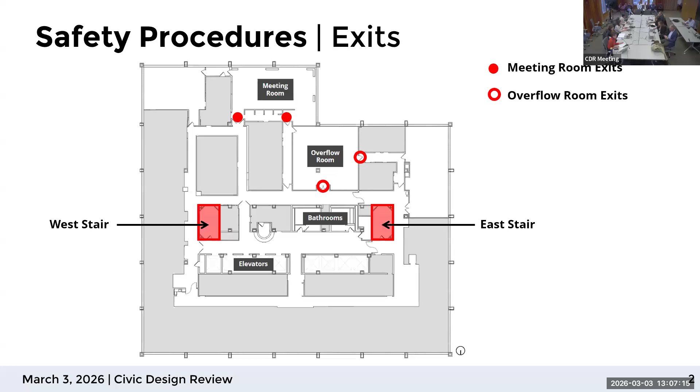The Civic Design Review Committee is a subcommittee of the Philadelphia City Planning Commission and is charged with assessing the design of the public realm of proposed building projects in Philadelphia and how they impact their neighborhoods. CDR is an advisory process. However, applicants are encouraged to accept the results of the review and incorporate the committee's findings into their design.

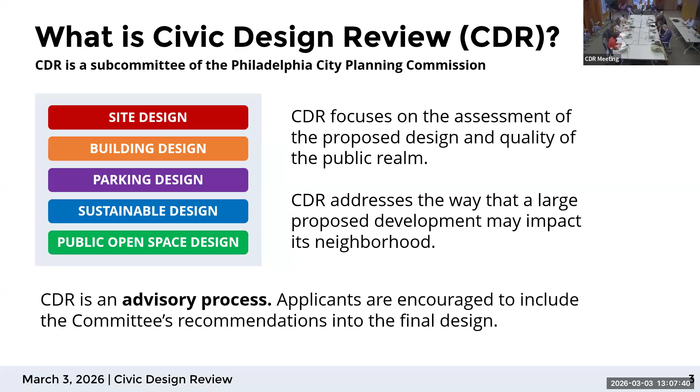The Civic Design Review Committee encourages and values participation during its meetings. Members of the public will have the opportunity to comment on agenda items during the public comment period. Questions and comments will be heard during this period, which will be open and closed by the CDR committee chairperson. Public comments should focus on the design-related issues only. When addressing the committee, please speak clearly and identify yourself by name and, if applicable, affiliation. A 2-minute time limit for public comments will be enforced by the committee chair and the meeting host.

If virtual, please use the raise hand function in the Zoom application and wait to be unmuted by the meeting host. If joining by Zoom phone, you may use the raise hand feature by dialing star-9 during the virtual public comment period; staff will unmute phone users. Please note that Q&A is only for procedural questions. We ask that you avoid writing your questions and comments about the project using this function. Planning Commission staff can also receive comments by email. If you would like to submit an email, please send to cdr@phila.gov.

First reviews will start with an applicant's design professional presentation, limited to 10 minutes, followed by PCPC staff summary. Second reviews will start with PCPC staff analysis before the applicant's design professional presentation, limited to 5 minutes. Staff analysis will be based on the requirements of the zoning code and Planning Commission regulations, which will focus on site design, building design, parking design, sustainable design, and if applicable, public open space design.

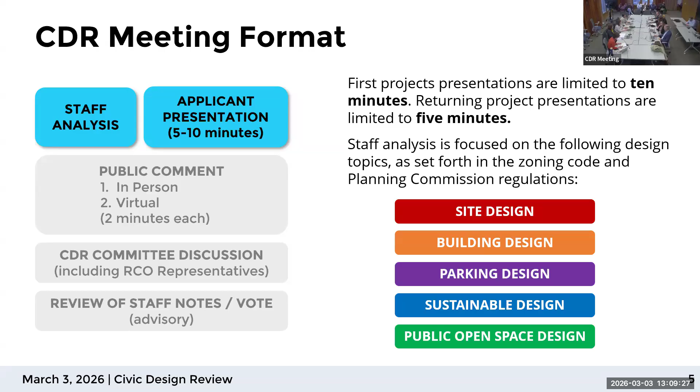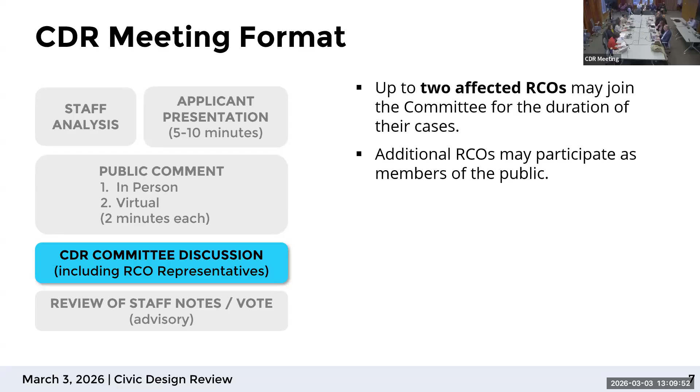Public comment will follow. Please do not restate the comments of your neighbors. Comments submitted in advance via email have been given to the committee and do not need to be read aloud. CDR committee discussion will follow the public comment period. Up to two affected RCOs may join the committee for the duration of their cases. Additional RCOs may participate as members of the public.

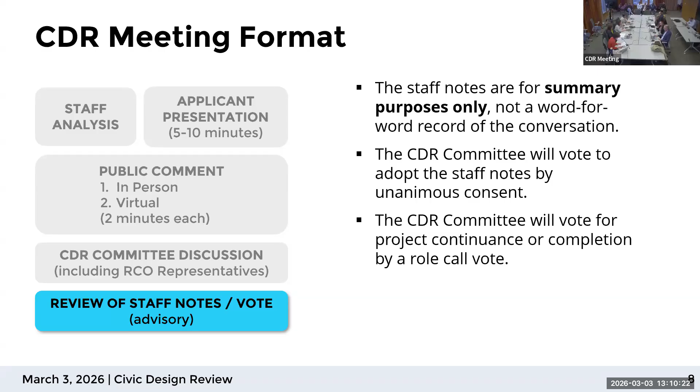After the discussion, staff will present notes taken during the meeting. The staff notes are for summary purposes only and not a word-for-word record of the conversation. The CDR committee will vote to adopt the staff notes by unanimous consent and will be voting by roll call on whether or not a project needs to return. For roll call vote, I will ask commissioners for their votes individually at the end of each agenda item. The chair will now call the meeting to order and announce the quorum.

Do you want to try? Try that. Thank you, Mina. Thank you very much. Good afternoon, everybody.

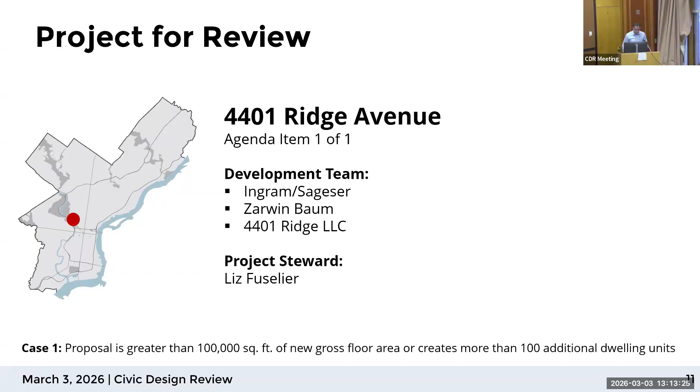All right, good afternoon everybody. Thank you very much for taking the time to meet with us. So I'll be presenting for 4401 Ridge Avenue. I'll give a quick background and briefing on it, and then I'll let Lance from Stokes Architecture, the design architect, explain a lot of the features and looks and feels of it.

This is a project that is getting a second life, so to speak. It was previously presented at a prior CDR and it didn't come to fruition. We've now stepped into this project. It's a different design than was there previously, but we did take into account a lot of features and aspects of the previous design that we thought we could improve on and make work better with the community.

We've worked closely with the East Falls Civic Group, we've met with the zoning committee, and we had our public meeting on February 18th, I believe. Then we had a smaller meeting with the neighboring senior housing facility, which is immediately adjacent to it. It's difficult for some people to really do the Zoom versus really bring it in person and show everybody. So we showed them the CDR design just to get some feedback from them and inform them about it, along with the numerous meetings we had with the zoning committee.

I think it's been a very fruitful and positive process in that they gave us a lot of feedback, which we've incorporated. If you look at the original zoning plans versus what you're seeing here, it's almost a completely different project. We had these arches that really kind of took over a lot of the look, and that was completely removed. As I go through the project, I'll be able to show that.

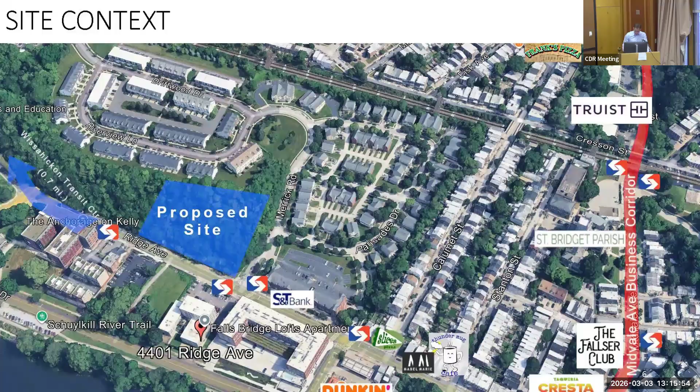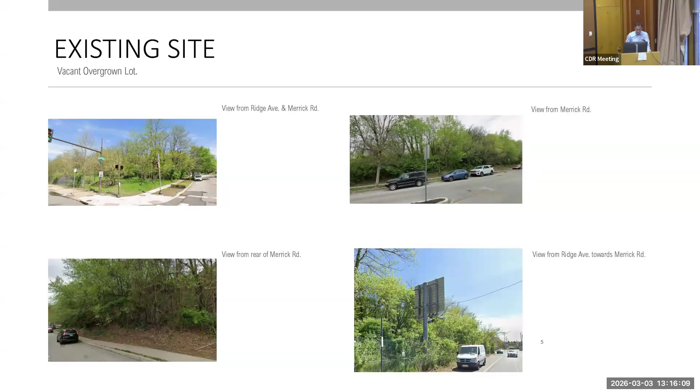So what we did was, I want to show it. It kind of shows it here. You see how this all kind of rises up. There are actually houses that sit behind there. And the prior project was going to build right up onto its property line.

There's actually an existing retaining wall that was there that they would remove. And there's a lot of trees that are all in the back over there, which you can kind of see along in this view. So instead of us doing what they did, which was build right up onto the property line, or remove that retaining wall, disturb even more of the steep slopes, and then get rid of all those trees, we actually set the building back 20 to 30 feet along that side.

We preserve the existing retaining wall. We preserve all the existing trees that are in that location. And the height of the building is actually 20 feet shorter. So we went shorter in height at the rear, and we pulled the building back further away from it.

We added, and I think that's like a major component, a major issue that was from the prior project. And then, of course, we tried to soften up and do a lot of articulation and whatnot in the facade.

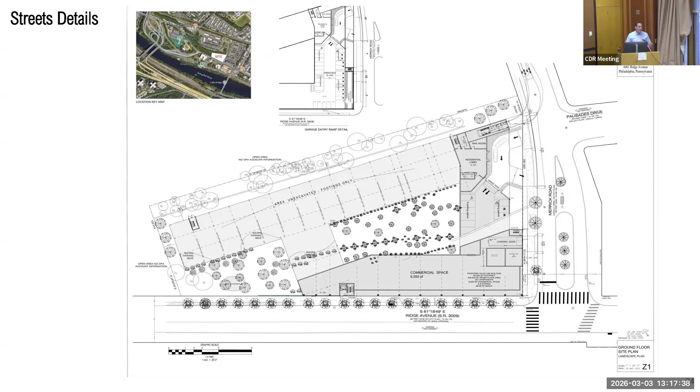I think a big thing for us in talking with the Civic group was really making it a walkable and approachable retail space. I know there's some difficulties with retail in that location. And I think by creating that 8-foot setback along the sidewalk area, you can put outdoor seating for a restaurant or anything. It just makes it walkable, more of a promenade, really enhances the features of that area.

Because that's really the end - so when you go to East Falls after that, you're heading over to 76. So let me go. I want to talk about any of the major features.

Yeah, so this is the proposed site of the location. This is its proximity that, based on feedback that we received from our pre-CDR meeting, shows its connectivity to SEPTA and local transit, shows its access to the Schuylkill River Trail. Obviously, you're right there by Kelly Drive. There's a lot of runners, a lot of bikers, so we want to show that we're really in the proximity.

And then really as far as context for this site, this is a CMX3 zone property, right? So this is meant for very high density. Obviously this building could be a lot bigger. And the only thing that really triggered it, going back to what Rich was saying...

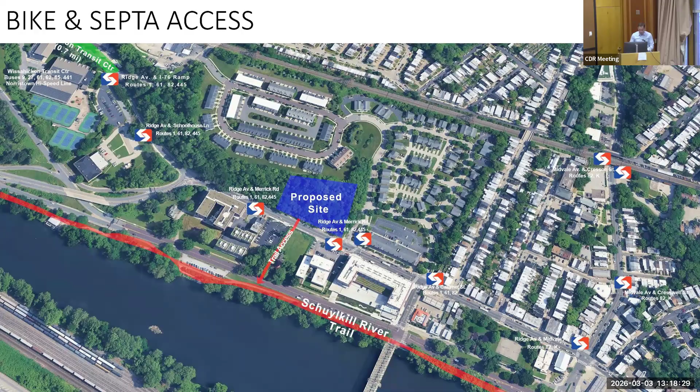If you look along here, right along here, this is where all the steep slopes were located. We originally proposed a curb cut on Ridge Avenue, which wouldn't disturb any steep slopes. And the streets department wasn't too happy about it. We had a scoping meeting with them involving PennDOT as well, and they said, really, we'd prefer you to have it up here.

That's actually what the prior developer had put together. Obviously, they had the same conversation. We didn't know about their conversations, but they said, do it up there. And it just made sense because really you were only going to be able to make a right turn coming out onto Ridge Avenue, and that really takes you to no man's land. If you're really trying to go left and go south, it's a very circuitous route. So Merrick Road has its own traffic light that is located over there, which helps control the traffic.

We pushed the driveway up. And what we did, a major component to this, is there are 2 loading docks that are here. The intention here, you see there's this circulation that kind of takes place.

What we want to do is limit as much traffic that's coming in onto the street. We don't want people double parking, so we have a pickup, drop-off. The width of this area is enough for 2 cars, so one person can pull up to the site and drop somebody off or drop off packages, and somebody else can take an Uber, drop off, and then circulate out as well.

And then of course it can continue into the building, with loading zones for people moving in, commercial deliveries, and trash pickup. The idea is one loading dock is the upper one, closer to our commercial trash, and the other one is for deliveries coming in, like UPS and FedEx. The point is we understand and appreciate that it's a larger project.

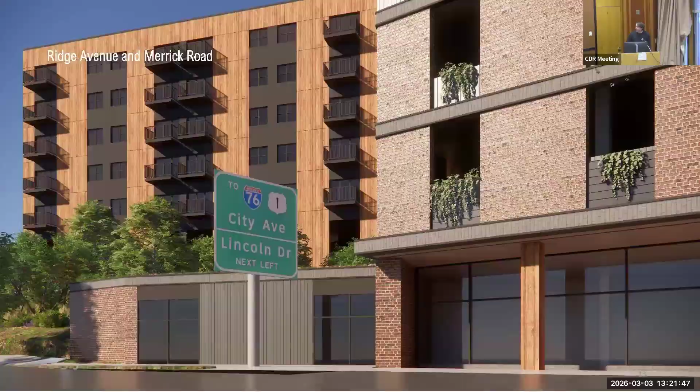No problem, I'll run through it real quick. Eric covered a lot of what we're going to be talking about, but I wanted to point out a big part of what we're trying to do is reduce the perceived massing of the building. We've got this donut-shaped building, and a lot of what we were trying to do was make it feel like two buildings, break it up a little bit, and cut the massing down, especially on Ridge Avenue.

The previous design that Eric mentioned had these large arches and was very inhospitable from the pedestrian point of view. So what we wanted to do, as Eric mentioned, is set back the commercial on the ground floor to create a more generous pedestrian walkway. As we know, Ridge Avenue is trafficked and people go fast on it, so having people set back from the street a little bit is very helpful.

Secondly, we also set back the top floor, reducing some of the unit count as well, to create a bit more relief of the building from the Ridge Avenue side of things.

And lastly, I'll mention a big part of what we wanted to do was material selection. On the back side, the hilltop side, we went with a wood look cladding, which feels a bit more natural and blends into the rest of the environment and landscaping around it. On the Ridge Avenue side, giving a nod to the context of surrounding buildings, we went with that Kelly brick on the ground floor plane, creating an implied structural grid over the entire facade that we break up with different colors, digitizing the facade a little to break up the perceived massing from Ridge Avenue.

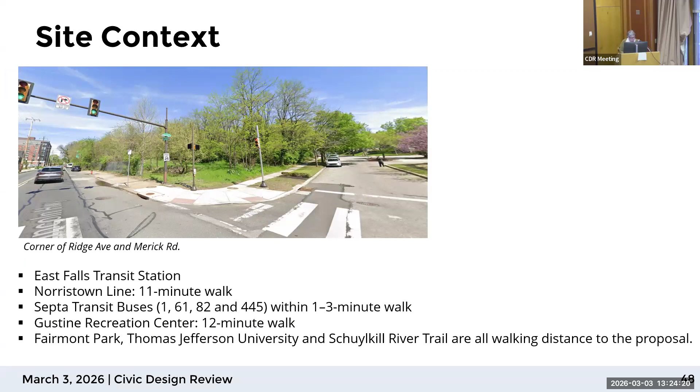This proposal is in a transit-rich area with numerous bus, train, bike, and pedestrian options available in the community. The street trees fronting the proposed building on Ridge Avenue are appreciated by staff. Due to the adjacent parks and trail networks, please consider adding bike racks along Ridge Avenue and Merrick Road.

Staff encourages the commercial use proposed at the prominent corner of Merrick and Ridge. Daylighting the ground floor windows will add to the strong street presence. The blank brick wall along Merrick could benefit from additional visual interest. Consider a mural to activate that pedestrian-friendly section.

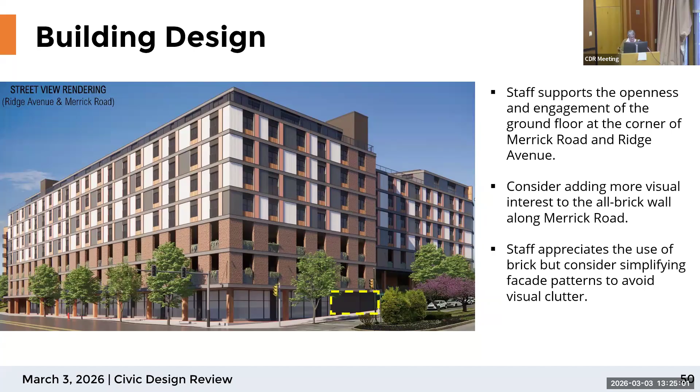The expansive green roof and rooftop amenity are greatly appreciated. Consider adding landscaping along the roof line to soften the safety railings. Please consider adding a mural or some kind of decorative color or brick to the entrance wall along Merrick Road.

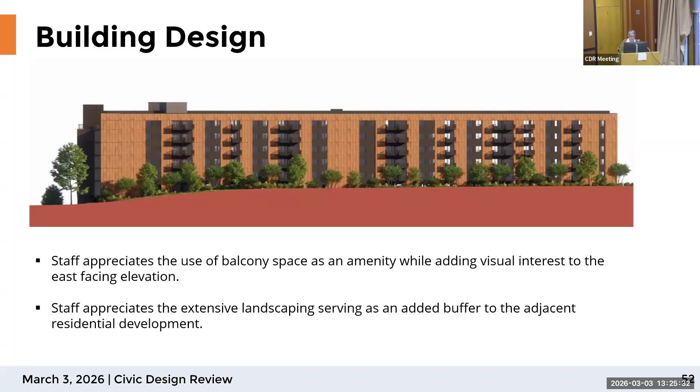Staff appreciates the use of balcony space as an amenity while adding visual interest to the east-facing elevation. We also appreciate the extensive landscaping serving as an added buffer to the adjacent development. The deck parking is appreciated, but staff asks for a greater number of EV designated spaces be added to the existing proposal. And for ease, the bike room may be better situated closer to the main entrance.

The proposal meets 8 of 12 applicable metrics. Consider adding solar panels to offset energy costs for residents and the overall building. Thank you.

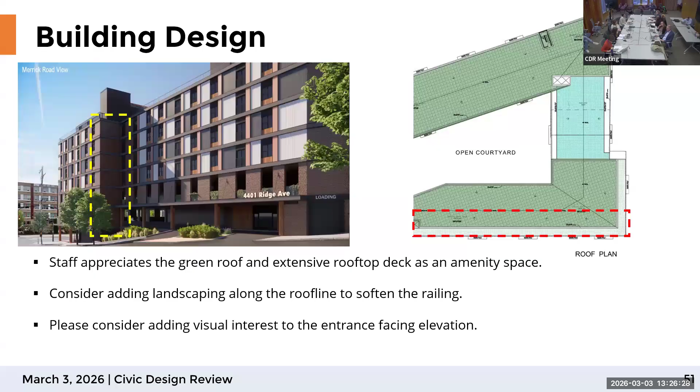This is a very important site for us in East Falls. It's the last remaining CMX3 site. We feel that if it's a good design, a good building, then it can really help us revitalize what has been a fairly unsuccessful...

Okay, sorry. Thank you. Shall I repeat that? Yes, please. Okay. Thank you.

So this is the last CMX3 site in East Falls available for redevelopment. It's critical that this is a well-designed building so it can contribute to the revitalization of our commercial strip. Everything after this building will just be CMX 2.5 small-scale redevelopments within the commercial district. The adjacency to the river is important - this building acknowledges its site next to the river. It's not landlocked. It looks at trees across the valley, trees in the back, and there's a river half a block beyond. So this has a chance to really make a difference for East Falls.

Briefly, in our neighborhood meetings, the feedback to date has been about traffic and congestion. They're worried that folks are going to be parking on the streets. Where are people going to be parking who would go to a business once this is occupied? These are valid concerns, but CMX3 doesn't necessarily address traffic and traffic congestion within the zoning guidelines. CMX3 wants to add people to revitalize and create demand in commercial areas.

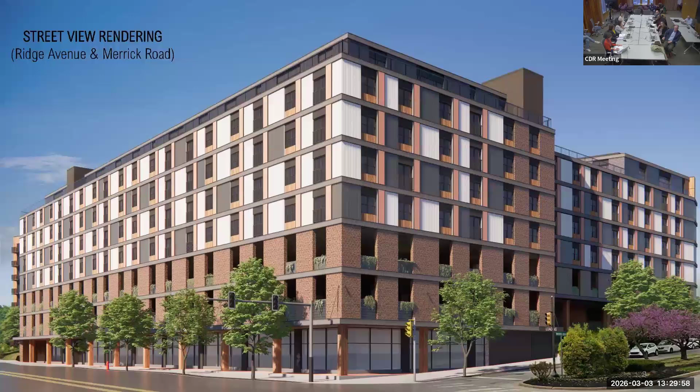Site design, yes, they built on the steep slope, and you understand why. However, the green roofs and the balance of open spaces has created a fairly adequate stormwater management scenario. So we've lost a steep slope, but we've retained many of the abilities of steep slope to manage stormwater. All parking is inside the building. They've far exceeded their parking requirement.

So we hope that the impact on the local streets will be as small as possible, and that in supporting retail, actually they've agreed to look into the possibility of accommodating some parking for retail inside the building, which would give them a better chance, I think, of renting and leasing this space, which the community would really love to see.

Satisfaction of building design - we've really not had any feedback from the community on this. Our zoning committee, which is 17 strong, has been interacting with them since January. And Eric has explained the number of changes that you've seen here, even up to yesterday, which I don't think you're seeing some of the latest incorporations here. But they've been very great to work with and have acted immediately upon some suggestions.

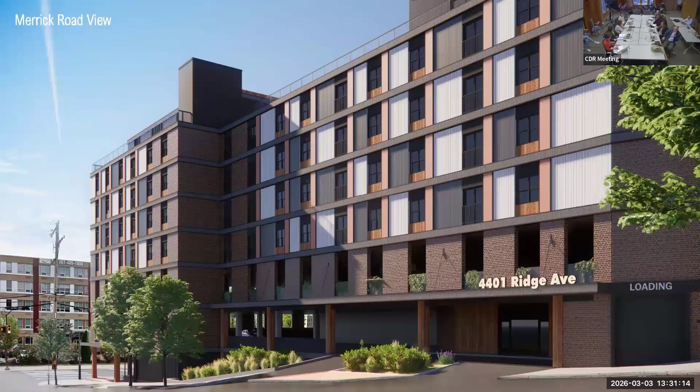So that is about it. In comparison to the scheme that came through here 3 or 4 years ago, this project is 10 times better. We have street frontage, we don't have open parking lots, and we don't have a 9-story building in the rear completely obscuring views from Hilltop. That would be the summation of my comments.

Thank you very much. I'm going to open it up to the committee members for any questions. I had a couple questions. You mentioned the 8-foot setback along Ridge Avenue. I was just curious what the dimension is between the edge of the building and the curb. There are dimensions, I think, on the plans, but they're just teeny. It would be awesome to have seen a section cut through the sidewalk there. I appreciate you mentioning that setback, but that's my first question.

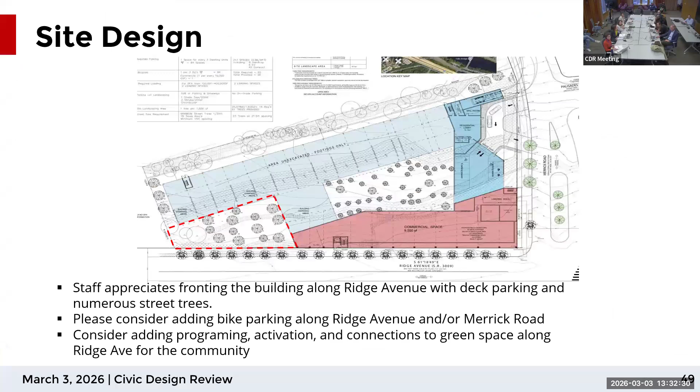My second question is, I just want to confirm that the site plans are accurate with the number of street trees. There's a discrepancy between the plans and the renderings, which only show 4 trees. I'm assuming the site plans are correct. And then finally, if you look at the aerial view...

I was just curious, I had a couple questions. Sarah, is this one you want? No, the aerial view.

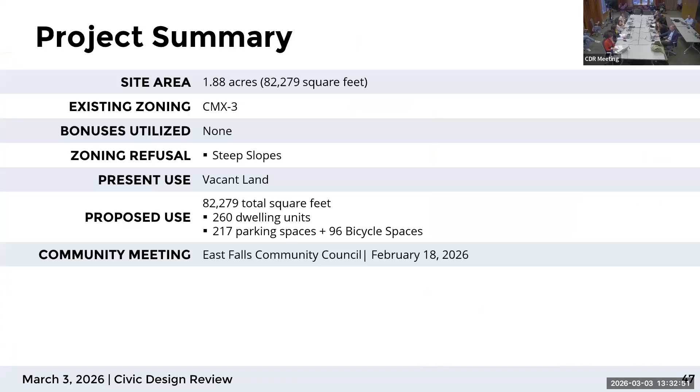In the aerial view, you can see cars on the left-hand side, adjacent to the landscape area. I'm just curious, is that parking or a traffic lane? Awesome. And does that parking continue along the front of the building?

I was also curious about the setback of the adjacent townhomes, if you knew what that setback was from Ridge Avenue. Do you mean the setback on Merrick? Yeah, the senior housing, I guess. You mentioned the 8-foot setback from the curb, and I'm curious, as a point of comparison, what the setback is from the property across the street.

I believe, is Shane in the Zoom? Shane's my civil engineer and my dimension guru, so it's hard for me to look at it, but he has it. If you look, the senior home facility is actually across the median, so it's pretty far. They have parking along Merrick Road closest to our building, then the median, then another lane, so it's pretty far away, not that close to the building. Totally, but you don't know what the setback is. If Shane was on... Shane is texting me now. 13 feet is the sidewalk, and then, is it 20 feet? Yes, 20 feet from the building to the other side of the street.

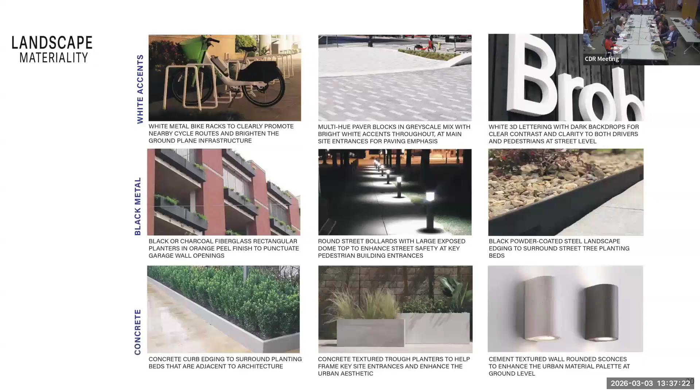Excuse me, can I speak to that? So the plaza, the 20-foot plaza at the bank, is elevated and deserted. It's not maintained, it has weeds in it. And the landscape buffer between the steps has dead trees in it. The low plants are maintained.

We think that the 8-foot setback underneath the face of the building will provide so much possibility for seated retail.

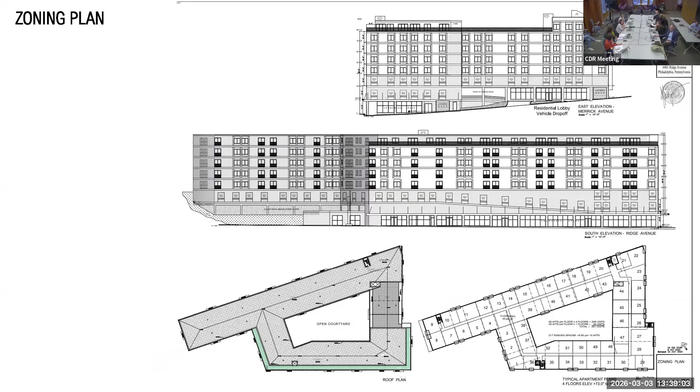I know it's in the planning phase and you probably don't know how many tenants you're going to have. There's no doors rendered or noted on the plan, but I think you'd benefit by showing some life there in your renderings because it feels very compressed. Typically I'd see a retail level taller than its comparative residential levels. When I first saw that, I thought maybe it's a dentist or office space, but right now it doesn't feel like retail, cafe, or restaurant space. So I did wonder what was envisioned there.

It's just hard to envision it the way it's rendered now, and it feels very tight. I don't know what the height actually is or if it's just a result of the rendering, but right now it feels crunched. We develop retail edges and public realm in cities all over the country, and that setback is not adequate for a lively environment like you're suggesting. With no buffer along a major road, I don't see how that would be somewhere anybody would really want to hang out.

I think it's about 14 feet in height. There's a lot of constraints here. We want to be mindful because this is the tallest portion of the building, the Ridge Avenue side, because of the way the site slopes. Then you also have 2 levels of parking that fly above it, so there's some movement in the slab, ramping as you go up and around. But if I were to increase it, I'd make the tallest portion of the building even taller.

A lot of the feedback was it's an overbearing building, like how do you make it smaller? So where we really sacrificed was a lot at the back. We didn't want to do what the prior project did, which was make it really tall at the back and block everyone's view. So we did the setback on the top floor on Ridge Avenue, adding those balconies to really step it back.

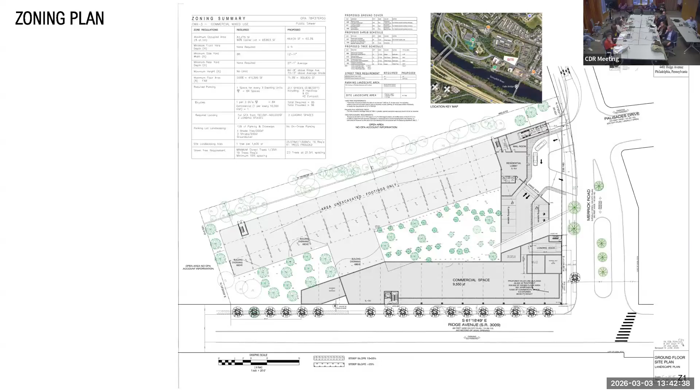If you go to the landscape design, there's a little layout that shows it, but it's meant to be a walkable traverse area with some park benches for people to go through. Same thing with the pathways highlighted as number 4, the raised wood walkway through the woodland courtyard gardens, that all continues through. It's meant to be a nice place to walk.

Has that been designed, or is this simply for us to understand that there are possibilities that could be there? What's the intention for that space? Yeah, that's the intention.

That's a landscape architect who put together these plans. It's conceptual for CDR, but he's been engaged to put together the whole design. The thought and feel is that you have these walkways with boulders and things that accent and feel, but we want it to be a traversable path.

So I think here's an opportunity to not only engage the commercial space that might front that, but how it connects to the other side of the site, particularly the naturalistic landscape. We're talking about the pedestrian experience and pathway along Ridge Avenue. I think, and I know there's issues about the slope, there might be a missed opportunity to really activate that naturalistic landscape space to help with pedestrian traffic and activity along Ridge.

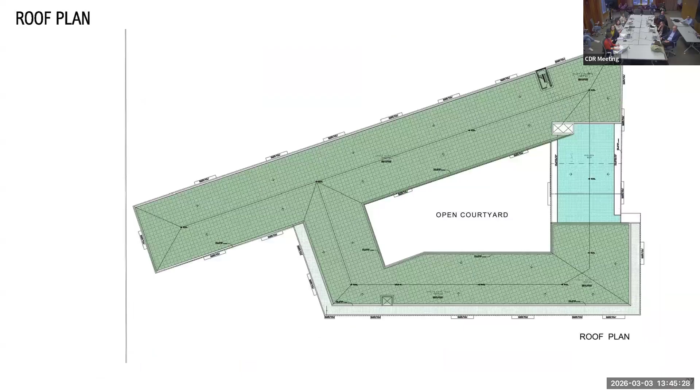There was a rendering that shows a small 1.5-story building that doesn't always show up in the other renderings. What is that building or piece? Yeah, so there's an overlay that we had missed.

During when we went through the zoning approval process, it was brought to our attention that there's a certain percentage of frontage that's required on Ridge Avenue in East Falls. So we added this small component here.

So what is it programmatically, or why is it needed? I'm sorry, I missed that. There's an overlay in East Falls. Hillary can speak to it better than me, but Hillary's the one that brought it to my attention. This was missed by the plan examiner and by us. There's a certain amount of frontage that needs to take place on Ridge Avenue.

Instead of adding so much more square footage, we just said we'll make this part of the commercial space, like more of an amenity space for the building, and not try to increase so much square footage on it, but also be in compliance with the overlay.

Okay, I think again, in terms of what we've been talking about, the whole retail component, that's a missed opportunity as well. You might want to take advantage of that, maybe to introduce yourself to the naturalistic landscape, pull it back, set it back, however that might work.

I just think when you're looking at everything else and how the building is composed, that's the one odd part that, well, it feels, as you said, added on. It's a really tough one because as you see, it's not doing it justice in the rendering.

There is a gigantic 76 sign that I'm almost interacting with, so I can't really move that. There's a reason why I didn't build the building all the way out there — we're required to be up on the front, on Ridge Avenue, so I'm not allowed to really push it back. I'm just kind of working around it. It's unfortunate, it's a challenge.

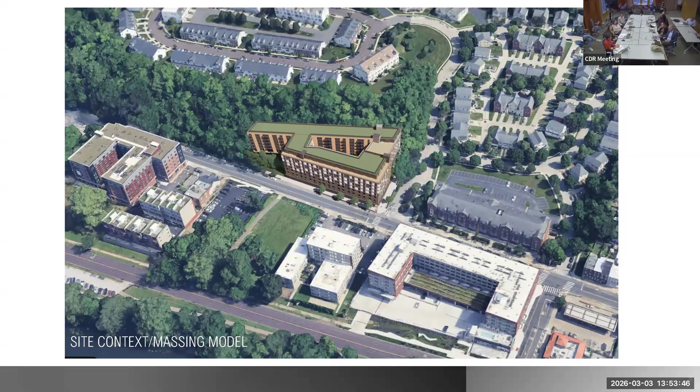Now, I do have a section that I emailed to clarify this prior, but there's a cartoon rendering that shows the sloping of the site, which shows you where the levels are. Long story short, the trees really do act as the screening, but the top height of the building you see here is about even with the top of the second floor of the houses that sit behind it, and the trees rise up right around that height as well, so we're all kind of even.

If I go any higher than that, for sure you'd see the building, and that would become part of their view. So the trees provide the screening and you're kind of even right there with the tree height. So you're not protecting their view shed of the larger landscape or the river, you're keeping the building out of view. Correct. We have another section that shows the slope at the rear, and we did a rendering of the houses to give context, but that's the answer.

Can I add something there? They did puncture the facade with some added recessed balconies, which I don't think you see here—about nine or ten additional ones. Which goes along the lines of what you were just talking about, creating some articulation and juxtaposition. So it's not just the Juliet balconies that give a feel; we have fully set-back, full-height, floor-to-ceiling balconies in random locations too, so it's not all stacked on top of each other, and it really breaks up the facade.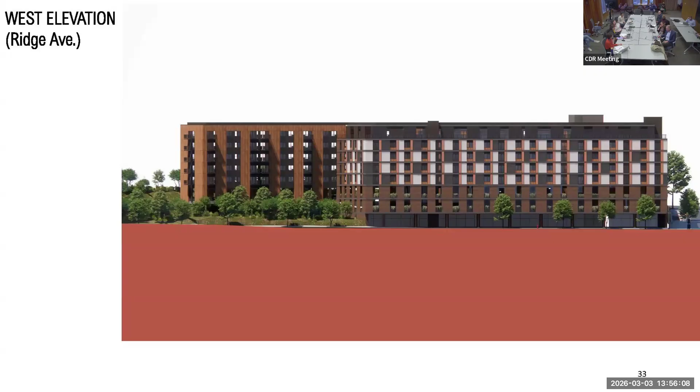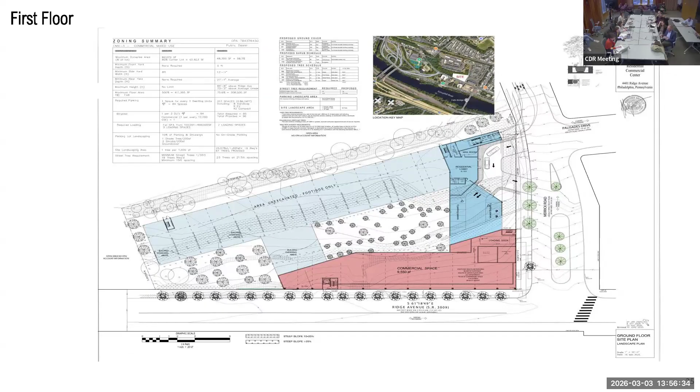Let me start with this. I'm really perplexed by this pass-through on, is it Merrick Avenue? Merrick Road. The Merrick Road into the courtyard. And the different drawings are not clear about what that experience is like, so it's hard to see the level of amenity that's really going to provide. This drawing is not obvious that there's any pass-through. It looks like a drop-off and entrance to the building and entrance to a garage, which is fine.

We all acknowledge this is probably the right place. I don't have any advice, but I'll say a couple things. One is you really got to drill down on this portion, because every move being made is rational. You got a good architecture team, you got the right intent, you got good advice from the city and the traffic folks and the planning department. So I would really drill down on the pedestrian experience at this entry, because it looks like it's dominated by the vehicular exigencies. You need to get the cars in, you want two lanes, exactly like you said, Uber drop off and food drop off and all that stuff. But the component that looks shortchanged is pedestrian.

And then the second thing is, if you're really welcoming people into the wooded courtyard, it's not evident from here. It might be evident once it's built, but I kind of doubt it. It looks like it's going to be a long and deep overhung or tunnel experience, and I just don't know. There reaches a point where maybe that good idea ceases to be a real amenity, and it's just a visual courtyard that you don't have a connection on both sides.

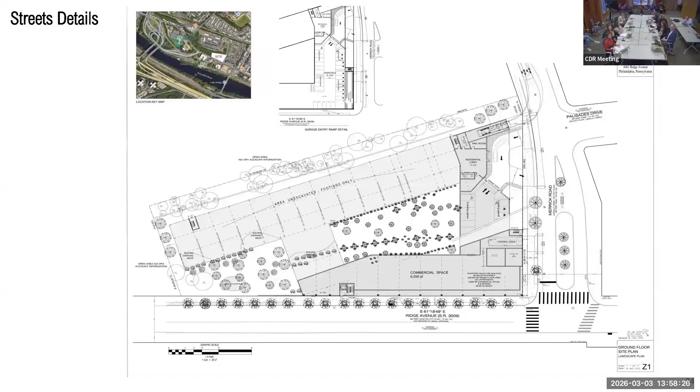So the courtyard is just a visual amenity for the residents, and it's not really a community amenity? Well, from the naturalistic landscape area, that'll be all open, and then there is a pass through from there into the woodland courtyard gardens. But it's unlikely a lot of people are going to use it from the public side, because there's no place to go, and you're just kind of peeking into people's windows.

You could access it from the lobby level that you have over here as well, up on the northern side. The point is that you would be accessing it from inside the building. There would be a door that gets you access, but it's definitely not coming off Merrick Road. The intention is the access for the public is through the naturalistic landscape area.

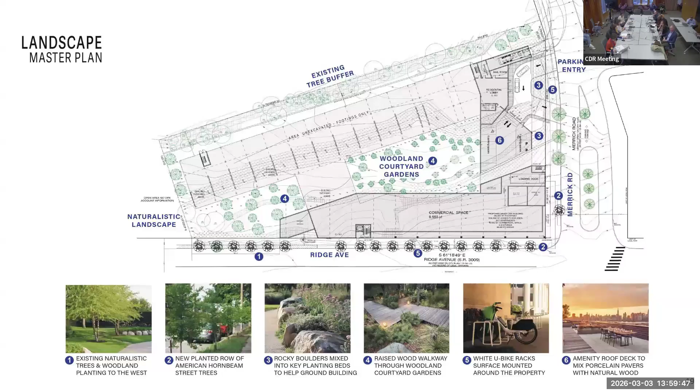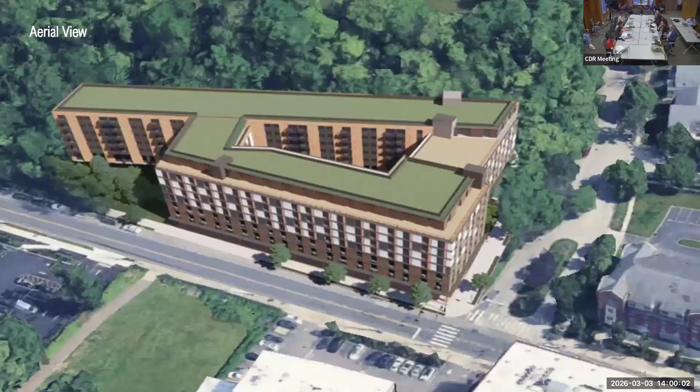Okay, well that leads me to another point which I'm not quite sure about, because it's hard to read. One of the key experiences you have as an apartment renter or condo owner is your experience to the ground. And it's pretty clear what's going on at Ridge, right? You're in an apartment, you're three stories up, and you have a visual connection to the river and everything on the north side of the building. But in the courtyard, there's a lot of different ways it can work, but it's not clear what's going on.

Are you two feet above the grass? Are you ten feet above the grass? Is it something that feels right in terms of privacy and aspect looking out, or is it a place where you have a balcony and you're at eye level with someone who happens to be walking in the courtyard?

So since it's not represented in these drawings, it's going to have to be solved, or maybe it is solved, but just be very attentive to the relationship between the apartments and the courtyard in terms of issues like privacy.

Remember, the parking garage, so the first couple of levels is all parking. So no residential every time you're like 10 feet or more above. That's on the ridge side, but how about on the rear side? Also true? Okay, on the north side as well. So there's no walkway on the north side.

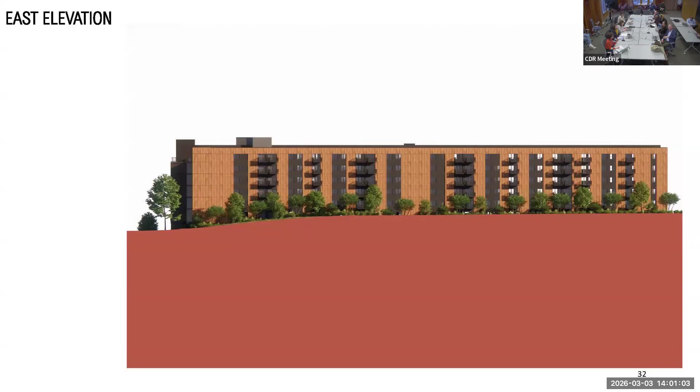The light blue - the section through the building describes it pretty well. The light blue is the parking, the darker blue is the residential units, and the red is the commercial.

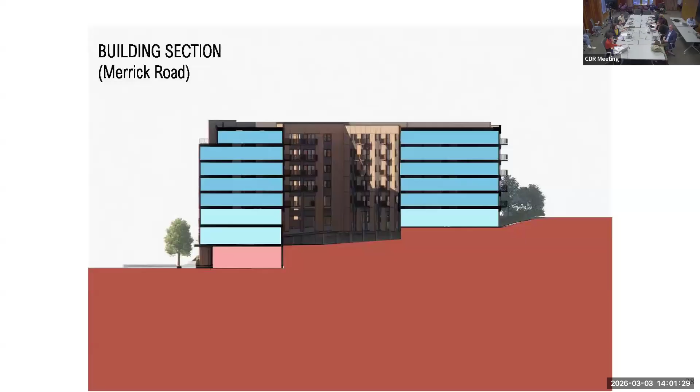One thing, this is a tiny detail, but it may be an important one. On some of the images, we're struggling with this retail relationship to ridge. I know from experience, 14 feet is high, but it also looks compressed. So you're getting feedback on that. One of the things - it looks like there's a step up. You probably want to try and get rid of that, so it's continuous with the sidewalk.

It's a function of the rendering just being what it is. Excellent. Not a surprise, but excellent.

Trying to think of all the things I've been thinking about as we've been talking. One of the things that was in the back of my mind is the sustainability agenda.

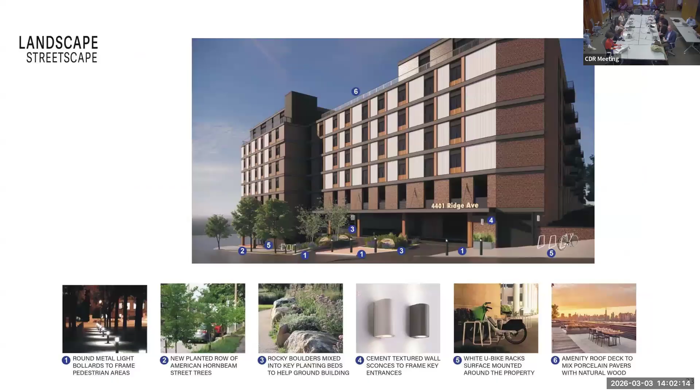The planning commission said maximize your EV charging spaces. I talk about this every time because I have an EV, so I'm always looking for charging. But also, we really have to take a longer view about sustainability issues in general, because we're in many ways in a dark space right now for all sorts of reasons nationally. Oil prices jumped 10% in the last 2 days for obvious reasons.

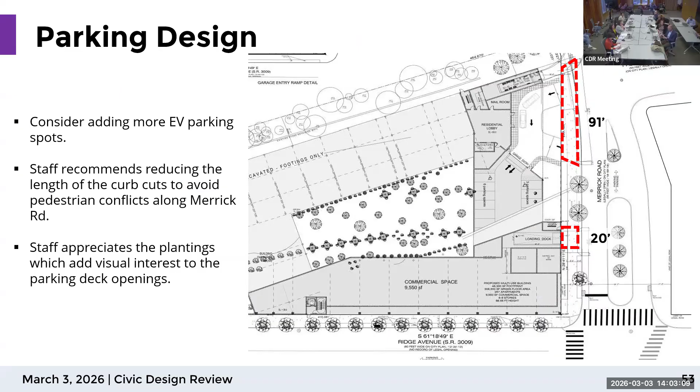The financial incentives from the federal government are at a nadir in terms of solar and high performance walls and all that type of stuff. But by the time this is built, we're going to have 1 year left in the Trump administration. And so these issues are not erased because people aren't thinking about it. When I looked at the sustainability checklist, there's a lot of NAs or zeros or something like that.

I'm just encouraging - this is a high quality development with a lot of units, and the neighbors are saying this is an amenity and they're looking to get a lot out of this. Maybe do as much as you can to follow through with the sustainability agenda - things like Energy Star compliant or Energy Star exceeding on building envelope, equality and performance, wired, and put in as much as you can to make solar on the roof be a natural or easy thing to follow up on as soon as the incentives come back. Those kind of things are going to be important.

I have a rental property and I just got the absolute highest electricity bill ever, even though there's solar on the roof - it was covered in snow. So these things are going to be - this building's going to be here for 40, 50, 100 years, whatever. These issues are going to be all important in the next generation, so keep that in mind.

The only thing I'd say is that we avoid using fossil fuels in our buildings, so it's all electric, for whatever that's worth. It is with anticipation of opportunity that comes down there - hopefully the grid one day is actually clean. We're very mindful and deliberate for all our projects to really be heat pump heating systems. That's definitely the right way to go.

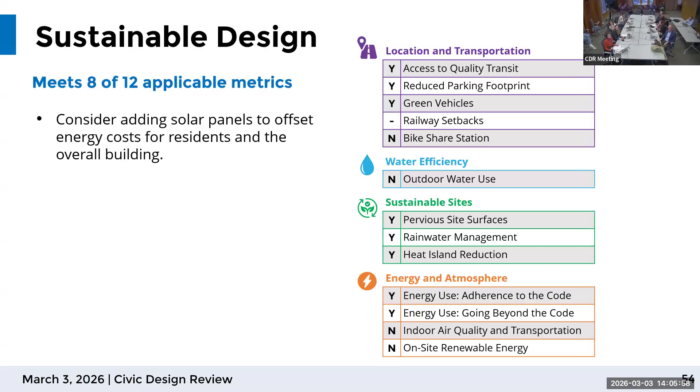Okay, thank you. So I'll read through the notes and then we can agree that we are in agreement with what is stated. So from East Falls Community Council: this is an important site and the last CMX3 site in the area. The zoning doesn't take into account the traffic.

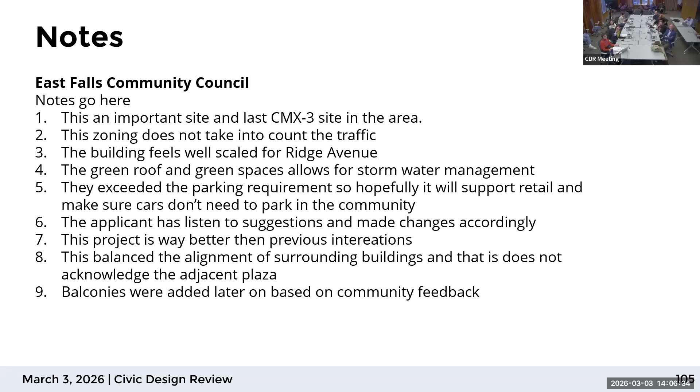Okay, let's maybe take that away. The building feels well scaled for Ridge Avenue. I think the note was that the community expressed concern with additional traffic, but there's a good amount of parking.

And I think that was the complete thought. The green roof and green spaces allow for stormwater management. They exceed the parking requirements, so hopefully will support retail and make sure cars don't need to park in the community. The applicant has listened to suggestions and made changes accordingly. This project is way better than previous iterations.

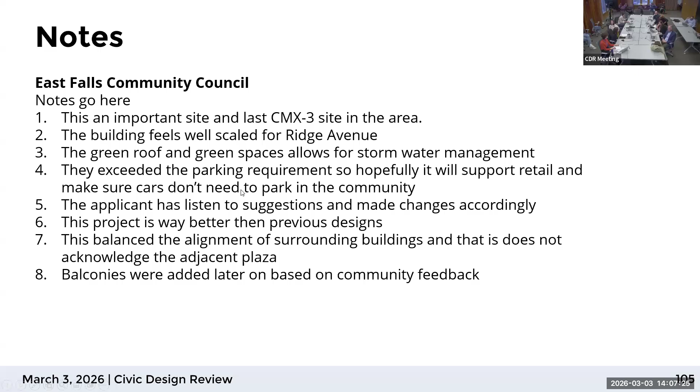This balances the alignment of surrounding buildings, and it does not acknowledge the adjacent plaza. This balances the alignment of surrounding buildings... oh, across the street. Yeah, correct. Okay, balconies were added later on based on community feedback. Are you okay with that? As stated, okay. All right, and then we'll move on.

CDR committee: rendering and plans do not match each other, so we had some trouble understanding some components of the proposal. Please clarify the size of the curb cuts and setbacks and label them in the plans. We agree that the landscape palette is strong. The sidewalk feels really narrow on Ridge. Look at additional landscape features that could be incorporated along Ridge.

Push the setback further along Ridge so that it's similar to surrounding buildings. There was a discussion we had. There are no door renders, so it's hard to envision the retail space. It feels a little bit squat and does not seem very lively or a place where people will want to hang out, and embolden the corner could be one strategy that was suggested.

More details about the courtyard space and show the intention. Show how it can engage with commercial space and explore ways to make it a pedestrian way to other areas in the site and the community. I think what we're saying is help us activate, make sure that this is an activated space and that it's not flat for the community.

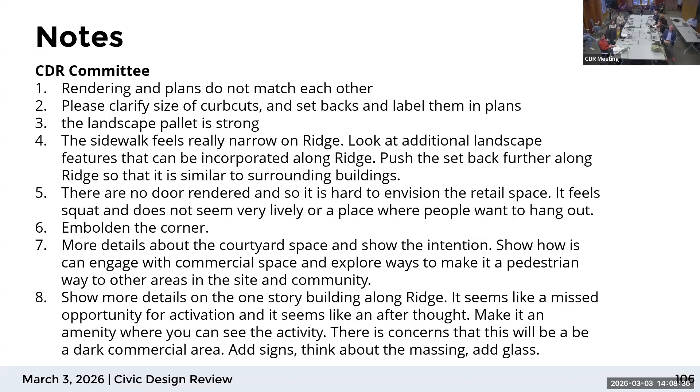Show more details on the one-story building along Ridge, or make it something lively and transparent. It seems like a missed opportunity for activation and a little bit of an afterthought, we established. Make it an amenity where you can see the activity. There's concern that there would be a dark commercial space otherwise. Add signs, think about the massing and add glass.

Add renderings that really communicate the space and the context so that we can see the impact on the communities around it, and the views currently don't show this intention. So that's always helpful. The massing is a bit monotonous. The materials do help to break it up. The size doesn't allow for views, so consider changing the heights on different parts if that was possible.

The committee appreciates the applicant being responsive to the community. The path through from Merrick Road is not clear. It actually doesn't exist, so I think we should delete that. Drill down on the pedestrian experience on Merrick Road.

The courtyard is just a visual experience for the residents, not open to the community. That was a clarification, so we ask that you're attentive to the courtyard and the residents' interaction with it. We established the first couple of floors are actually parking. Maximize the charging spaces and consider ways to incorporate solar or solar hookups and additional sustainable features. Showcase the bike storage more readily.

Do we have a vote to say that the notes are in line with what was discussed? A motion - yes, I have a motion from Maria and second by Sarah. Great. And now do I have a motion to continue the review or to complete the review? And I need that from my fellow committee members.

I move to continue. I need a second. Yeah, I'll second, so we can get a vote. We have a motion to continue the review and a second to continue the review. We need to vote, roll the call. There's a motion to continue the civic design review process for 4401 Ridge Avenue.

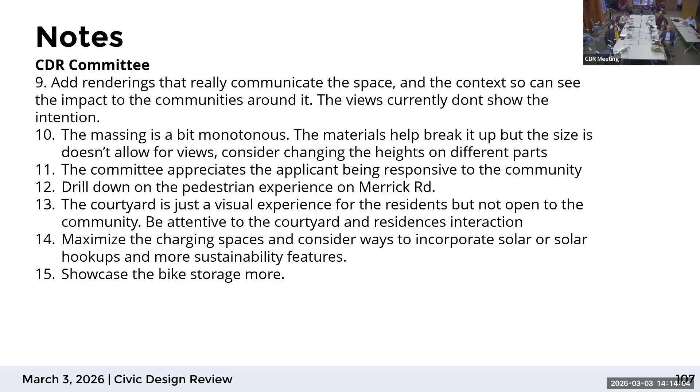Dan, you seconded - yeah, I'll say yes. Maria, do you support the motion? No. Sarah, do you support the motion? No, but that's because I trust that you will. Clarissa, do you support the motion? I do not, for the same reason as Sarah. Michael, you made the motion - you support the motion? Yes. Jimena, do you support the motion? I don't, and for the reasons that you have had that constant communication and you do have community support, and for me, that goes a long way.

The motion failed, so we need another motion. Okay, we're not done yet. Another motion? I motion to pass. To complete. Second. Okay, and seconded by Sarah. Now we need a vote, another roll call. There's a motion to conclude the civic design review process for 4401 Ridge Avenue.

Hillary, do you support the motion? I support that. Dan, do you support the motion? Yes, I do. Maria, you made the motion - yes. Sarah, you seconded. Clarissa, do you support the motion? Yes. Michael, do you support the motion? Yes. And Jimena? Yes, thank you. Unanimous support for the motion. Motion carries.

Thank you, team. We have a lot of pesky architects on our committee. Yes, we do.

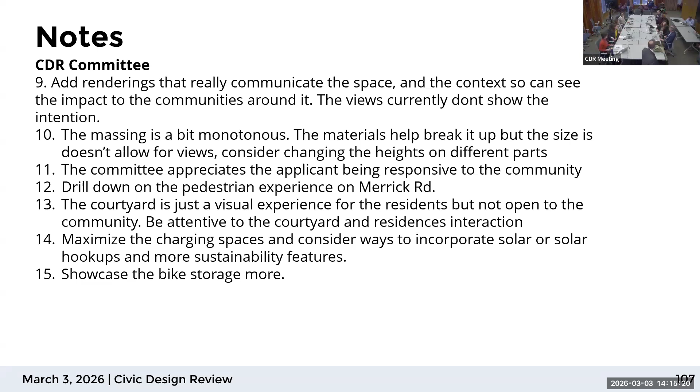So, I don't live far.